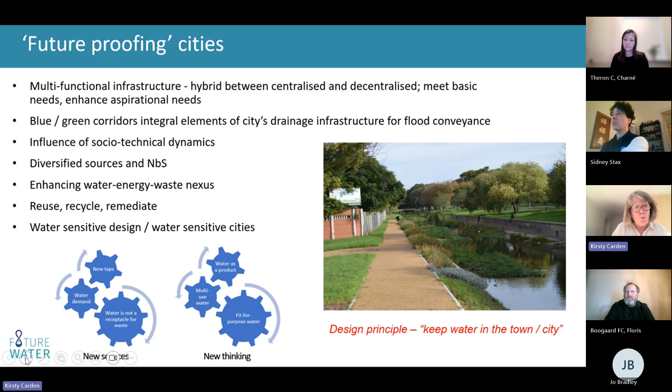These blue-green corridors and nature-based processes become integral elements of the city's drainage infrastructure, not only for flood conveyance, but also to bring people into these spaces to look at those socio-technical dynamics, to think about how we can enhance the nexus on water, energy, and waste, and really build what we consider water-sensitive cities, keeping the water in the town and city.

So the Future Water Institute speaks directly to this. We were formed in 2016, so we're almost 10 years old now, as a transdisciplinary institute to look at how we can build capacity and innovation around water resilience.

We work in three different themes that are all underpinned by one on addressing relations and values around water. So the social science becomes really important in the ways we do this transdisciplinary research and how we connect with non-academic partners in this space.

And what's important here is that we're talking today about the spaces in which we work, and one particular space is what we refer to as living labs. Of course they're not only places like the Water Hub or mining equivalents or what we're doing in and around the university, but also could be happening in small urban settings or in peri-urban spaces, as you'll see with some of the examples I'll show you.

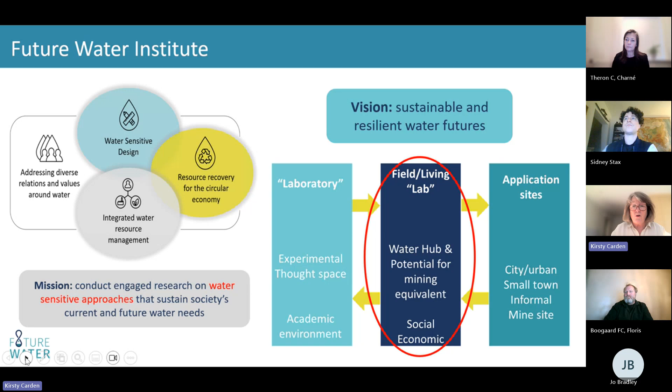It's a wine growing part of the country, very high-end accommodation, a sort of foodie capital, and a very beautiful part of the world. The mountains around Franschhoek are also some of the mountains that deliver the water we drink in the city of Cape Town and in Franschhoek itself.

So the land use around the Water Hub is largely agriculture. There is a significant informal settlement 2 kilometers upstream of the Water Hub, and in this picture you can see the informal settlement on the slopes of the mountain, with a small river called the Stiebeuel River running through it.

The river runs through the lower parts of town where there's a more formalized low-income settlement, through the agricultural area, and directly through the Water Hub, which is being developed here, and I'll show you what we've been doing at this Water Hub.

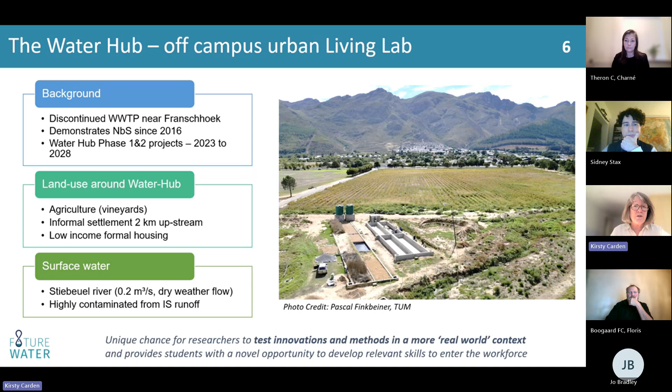So what it does is give us a direct link to very highly contaminated runoff from the informal settlement upstream, and gives us an opportunity to trial nature-based solutions, innovations, and methods in a real-world context, at a scale that shows what can be achieved without using chemicals, without using electricity, making use of nature-based solutions in any ways that we can.

So this is one of the test beds. The picture is taken from above. You can see what's happened here at the top is that we have transformed the old sludge drying beds from the wastewater treatment plant facility. They've been dug out and repurposed as a biofiltration treatment train.

Water is taken from the Stiebeuel River, which ran alongside and through the Water Hub, into a tank above what's called the SMART system. This was during the process of building the SMART system. SMART stands for Sequential Managed Aquifer Recharge Technology — essentially a sand filter on steroids. So the water goes from the river into that bottom green tank.

It's then pumped using solar power into the two storage tanks above the biofiltration treatment train, and the water is gravity-fed through that treatment train through different cells. The LS stands for large stone, so there's a stone aggregate in there between 19 and 25 millimeters. It then goes into a biochar chamber, and then into a small stone chamber at the end.

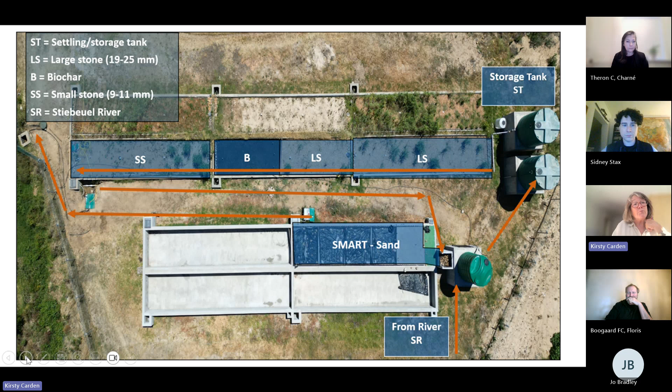So one of the experiments at the water hub is looking at the removal of emerging contaminants from polluted surface waters. This is obviously a very key problem in contaminated water that comes off, particularly off informal settlements in our context in South Africa, but also not only informal settlements, although we're certainly picking up very high concentrations of these emerging contaminants in the runoff from here because of the lack of services.

The chemicals, emerging contaminants in this regard, are pharmaceuticals, lifestyle markers like caffeine, microplastics, and personal care products. They're present in trace amounts, and they're very persistent in our environmental waters, resistant to degradation, and can bioaccumulate in soil, crops, and even humans.

So this is, of course, of concern in a very unregulated environment like we are in, and it's an experiment that's been undergoing for a couple of years to try and see whether the nature-based solution, the treatment train established at the water hub, can remove these CECs sufficiently so that we can make use of this water in peri-urban agriculture.

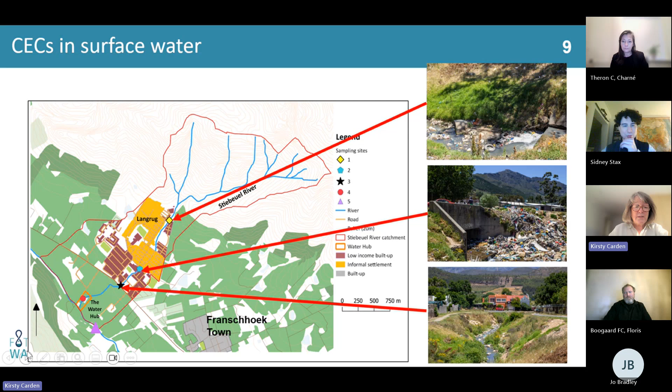So what are context-appropriate solutions here? In our context in the Southern Hemisphere, we're looking for easy to maintain, cost-effective and scalable solutions that can be put in place at a decentral scale, because trying to do this within an informal settlement becomes very difficult. There's not a lot of space, and there's a lot of interference by residents in the informal settlement. So having a solution that can be managed off-site, but that can still deal with the levels of contamination coming off the informal settlement, becomes really important.

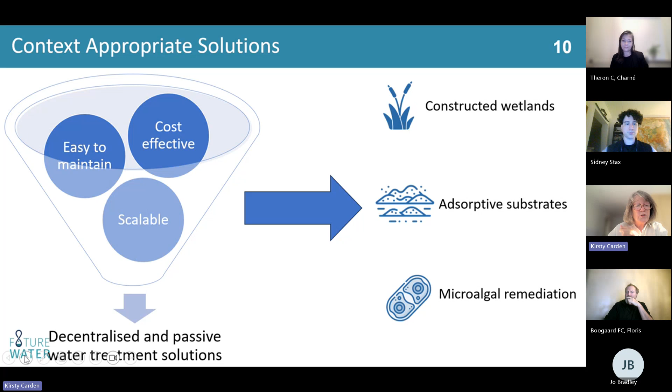In this regard, we considered constructed wetlands. So these little biofiltration cells become our constructed wetlands. We use adsorptive substrates, and there is also the possibility of microalgal remediation, which is happening in a separate project that I won't talk about today, but that also becomes one of the appropriate solutions for this.

So the biochar that we're using in the treatment train is produced from alien vegetation and used as this low-cost adsorbent in the constructed wetland biofiltration system. The nice thing about this is that we have a twofold problem around water in the Western Cape, and alien vegetation is one of our main issues. The alien vegetation that has proliferated in the catchment areas for our surface water systems needs to be cut down. If we can repurpose this invasive biomass into an effective adsorbent used in the biofiltration cell in a passive, low-maintenance treatment system, it provides us with a way to kill two birds with one stone.

In South Africa, we have black wattle, pine, and eucalyptus, all invasive trees growing in these catchment areas, and they all provide sustainable, abundant feedstocks for making biochar using a pyrolysis method.

You can see here a picture of the biochar we've used in one of the treatment cells at the Water Hub. In the next door cell, you can see the large stone, and in this case there's also been some vegetation put in as part of this system.

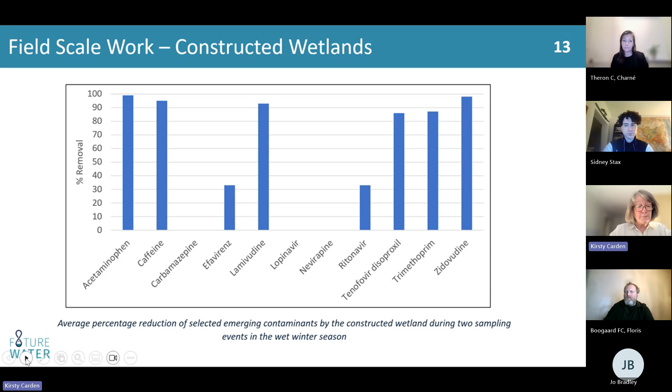Future work in this particular project is looking at the uptake of the CECs in crops. This is also happening at the Water Hub - there's a little experimental garden there that is being watered with different water sources, from raw river water to the biofiltered treated water and municipal tap.

They're looking at upcoming harvests, doing liquid extractions of the plant tissue and LCMS analysis of the CECs. From there, we'll try to compare the relative uptake and accumulation of CECs by these different crops irrigated with the different water sources, trying to come up with a risk assessment framework associated with consuming these crops.

The project plan for phase 2 of the Water Hub is really taking this now into much more of a focus on building social enterprises through different forms of livelihood creation with treated water, and bringing in other feedstocks, really looking at this wastewater energy nexus.

So bringing in food waste and organic waste, using biodigesters to develop fertilizers and sustainable cooking gas, upscaling the treatment system so that we have large volumes of water that can be used, and then providing further irrigation water to local farms to try to bring this into a sort of circular economy around what we're doing at the Water Hub.

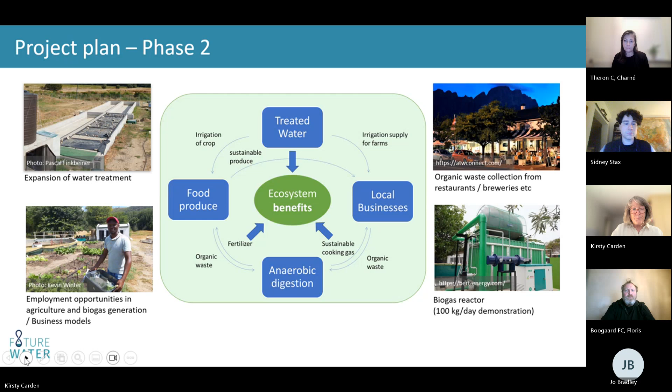Sorry, I've gone a bit fast there. Oh no, there we go.

Some of these livelihood opportunities would be around irrigation of vegetables and soil with treated and untreated water to study the mobility and uptake of emerging contaminants, as well as non-food related aspects like growing cut flowers for local market opportunities - another way to really close this loop around the treatment and use of water.

Another aspect of what we've been doing at the Water Hub is the restoration of the Stiebeuel River, a very small river that runs down through the small catchment and past the informal settlement of Langrug. It's a very polluted river. In 2021, when we started thinking about the river restoration, it was very overgrown with alien vegetation and did not have good quality water in and around the river at that time.

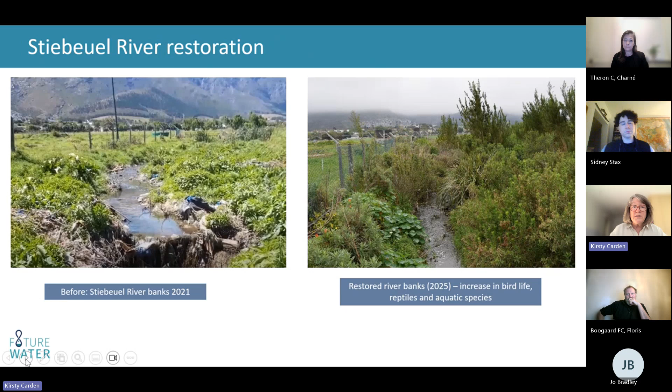There have been several projects underway to look at the restoration of the river together with the Western Cape government, with our provincial Department of Environmental Affairs and Development Planning, to re-establish the indigenous fynbos in this area, and to re-look at how we can increase biodiversity, bird life, reptiles, aquatic species, and increase water quality in that river through a very targeted restoration process.

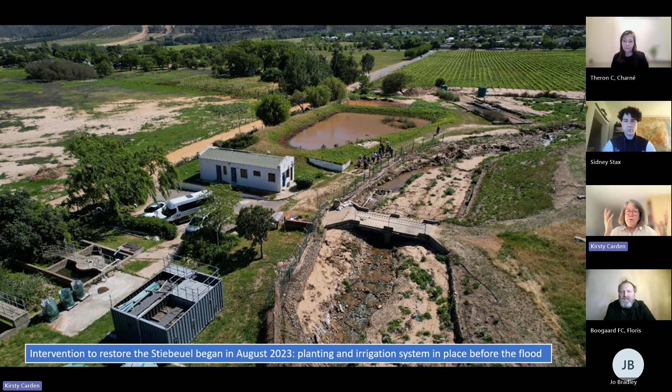So we did this in 2023. There was an intervention to restore the Stiebeuel River. This is an overhead shot showing some of the infrastructure at the Water Hub. You can even see some of the old wastewater treatment infrastructure still in place bottom left, and how they started to open up the Stiebeuel River that runs alongside. You can see the biofiltration cells—at that stage only one set. The river was starting to be opened up with planting and an irrigation system in place.

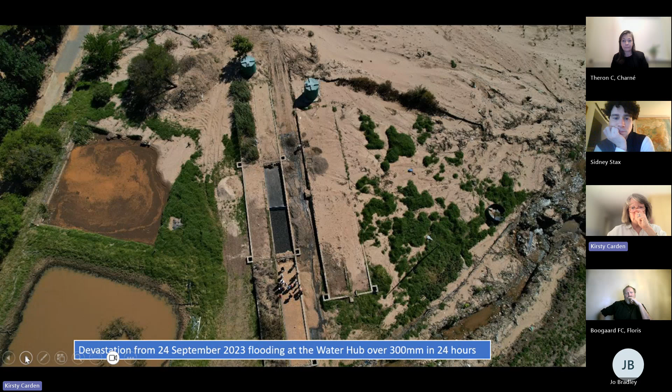But then in September 2023, there was a massive flood. 300 millimeters of rain fell over Franschhoek in a matter of 24 hours. This did some severe damage, both to the river and to our treatment infrastructure around the biofiltration cells, which you can see here were completely covered in sediment and mud.

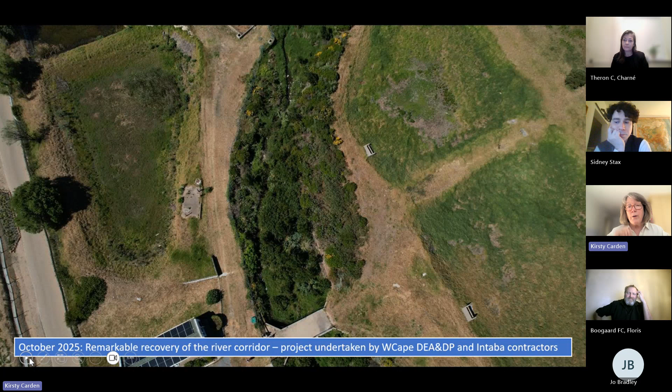So it took an enormous effort to rebuild the river, rebuild the biofiltration cells, and really work on re-establishing that river corridor. As you can see here, in October 2025 there's been a remarkable recovery of that river corridor, and a remarkable recovery too of the experiment with the biofiltration cells. A significant effort by students and researchers, with lots of extra cost. But as you can see, we're really starting to develop a useful, restored, and resilient river system that is being contributed to by the experiment and the treatment train happening there.

So this is one real aspect of the Living Lab approach at the Water Hub. There are several other projects on the go there too, but it's starting to demonstrate a really good integration of water, energy, and waste, and how we can build that into connection with the environment and building biodiversity as well.

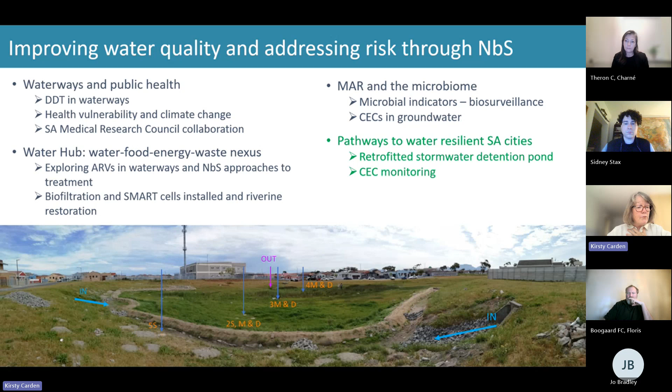So let me talk to you a little bit about that. The key elements of this project are that we're trying to use nature-based approaches to link storm runoff and wastewater to water supply, and to use those NBS or water-sensitive urban design elements and landscape-based solutions to integrate the already existing built infrastructure with some green infrastructure in a decentralized manner, but that starts to connect up into what we hope will ultimately be a water-sensitive city transition within a city like Cape Town, connecting these blue-green infrastructure moments across the city into something bigger than just the sum of all of them.

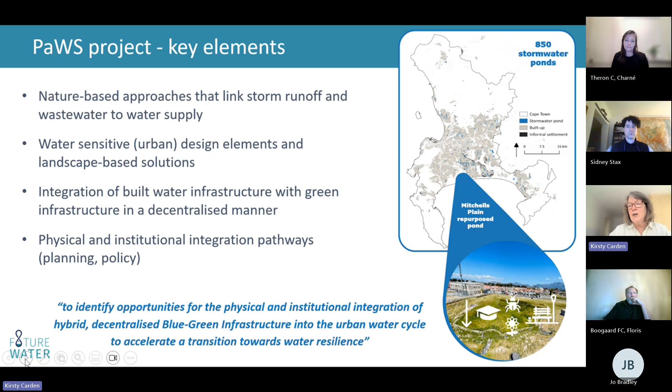So there are about 850 stormwater ponds in the city of Cape Town. We're quite flat, except where it's not flat—with the mountain, the bits in between are flat. We call it the Cape Flats. In the Cape Flats, there are around 300 stormwater ponds that work to prevent flooding in these areas, which are prone to seasonal flooding. The Cape Flats aquifer is quite shallow, and the water table reaches the surface during most years. So this is a space that really needs careful consideration for flood alleviation, but also provides us the opportunity to work towards this transition to water resilience.

So the project—you've seen a picture of the pond. This was it before construction. The two inlets on the left are from a small urban catchment, and there's an outlet in the middle towards the right-hand side.

The design of this pond was such that the inlets largely short-circuited the pond straight through to the outlet, and there was very seldom any settling of water in this detention pond. It would generally just flow straight out of the outlet and join the rest of the stormwater management system, going into further ponds downstream and into the piped system.

So we worked with local residents to co-design a low-cost effort to try and capture the water as much as possible in this pond system. The idea was that we opened out the inlets and put rock riprap down to slow the flow of water into the pond. We built a shallow, about 300 millimeter high sandbag wall using sand dug out of the site, to develop a meter and a half wide infiltration swale that runs along the contour for about 90 meters.

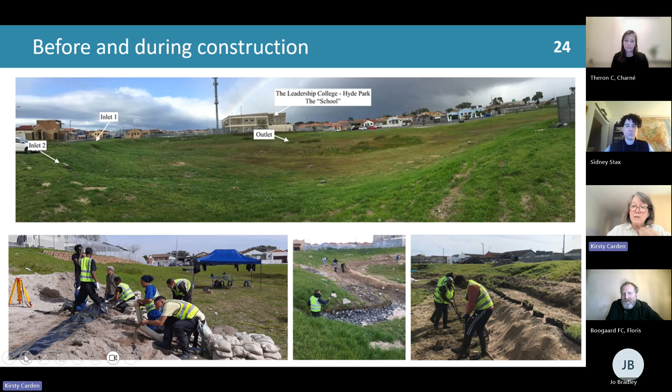After construction, you can see here in these two pictures, the inlet, there was a forebay created in front of the two inlets. The water then flowed into this infiltration swale that ran around the contour in front of the two inlets. There were little rock check litter traps at various stages across this infiltration swale that allowed the water to go through but kept litter back, which is a major issue in this particular environment.

Keeping the litter from entering the main part of the pond has made the cleanup of this area much easier. So the key findings in phase one were that we could do a low-cost retrofit, working with residents' consent and input, and we had some really good input from local residents. The high water table was found to be a technical challenge, but the retrofit did increase infiltration into the groundwater based on the hydrological model developed and calibrated with our measurements.

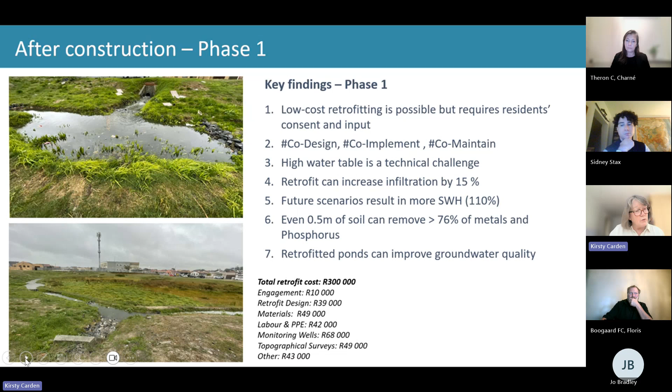Future scenarios with the City of Cape Town now abstracting water from the Cape Flats as part of their new water program can allow us to result in more stormwater harvesting, up to about 110% of the current infiltration. Additionally, we found that the soil, even at low depths beneath our infiltration swale and across the scope of the pond, could remove large quantities of both metals and phosphorus from the incoming stormwater. So these were good findings - we were increasing the infiltration and improving the water quality of the water going into the pond.

But more than that, we found that this pond system suddenly became a focus for building resilience in a city that really needs these types of green spaces, where they are very seldom used as anything other than dumping sites. They're prone to informal settlement invasion, and they're not used for useful or positive functions within the city.

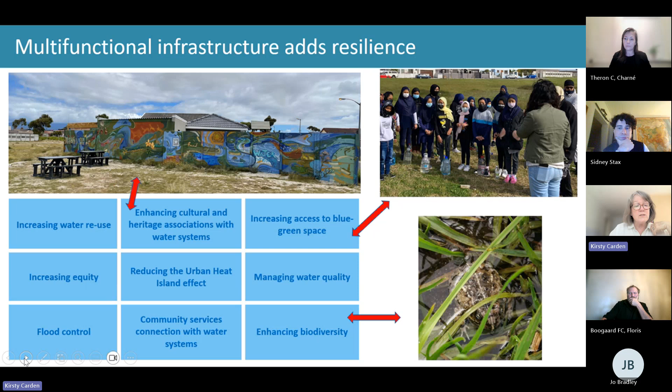So we've done quite a lot of other work at this pond to try and highlight this, to bring people into the space, to increase community gathering, and to think about enhancing the biodiversity. So I just want to show you a little bit more about what we've done.

We've built local stewardship with these residents, and we've acknowledged that having that local stewardship and involvement in these spaces brings benefits around enhancing safety and security and preventing land invasions. It also gives local people a chance to do citizen science and monitoring, and for us to work with local schools on education programs, making sure those community anchors provide opportunities for job creation and funding in what is a relatively impoverished neighborhood.

So to do this, we've tried to curate this biodiverse landscape, and to be honest, we haven't had to do a lot of planting. Most of the very local indigenous vegetation has re-established itself, as you can see in the bottom picture, in the wetland area, because it has been allowed to re-establish. There is now a no-mow policy in the middle part of the pond, to the extent that we've established a sort of stepping stone barrier around that wetland in the middle to prevent accidental mowing by the city.

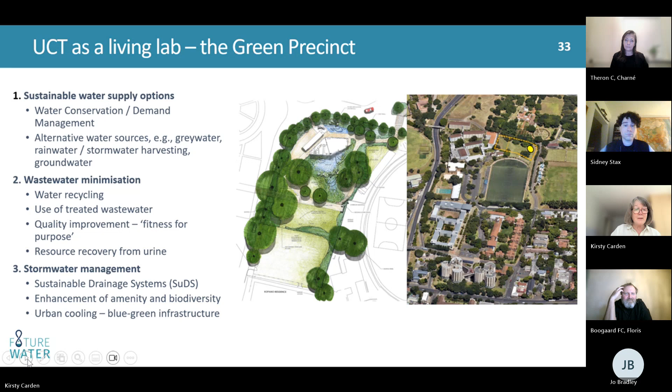Very lastly, we're thinking about a water resilient approach for South Africa. I've shown you a couple of examples of what we're doing at Future Water, but essentially it's about integrating across these different water sectors. It's not only about flooding, not only about drought, it's also about the ways in which people intersect in these sectors—things like wildfires and the socioeconomic problems we're finding across our cities.

So how do we break these silos so that we build resilience across all of these different risks? Emphasizing the links between drought, flood, and other water-related challenges, and really optimizing and integrating the management of all available water resources—not only surface water, but groundwater, wastewater, stormwater. They're all important to integrate into this space.

Harnessing nature through blue-green infrastructure, urban waterscapes, and nature-based solutions is incredibly important, and trying to understand how governance can be used to address this resilience through different scales and different actors. For us, building resilience and creating livable urban areas that place high value on water allows us to engage with a more transformative vision for the future of urban water in South Africa, and I'd imagine this would apply in many urban areas around the world.